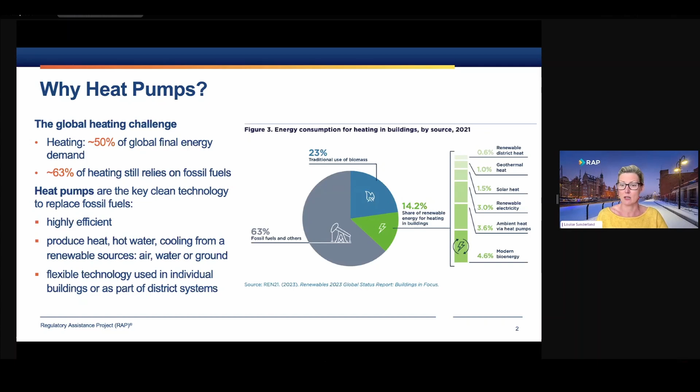They produce heat, hot water and cooling from renewable sources, and they're a really flexible technology. I think we tend to think about heat pump technology in very individual uses, like in a single home, but actually they can be used all the way from providing heat and cooling in an individual apartment, through to providing heat as part of a district heating system, or even for very large installations in industry. It's those credentials that I think have led, I think, all of the global scenarios now to see that heat pumps will be a key part of delivering against 2050 decarbonisation of heating targets.

So just including two examples here, on the left from the IEA, on the right from McKinsey, telling a very similar story. In both graphs, we're looking at the turquoise part. On the left, the IEA is looking at the global heating equipment stock, and you can see by 2030, but very significantly by 2050, the larger part of that stock is made up of heat pumps. McKinsey on the right is looking at sales rather than stock. Similar story though - heat pumps, along with district heating, are making up all of the system sales by 2050.

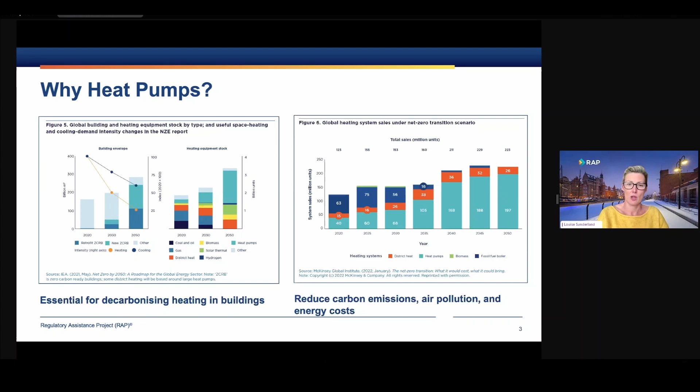And once again, just to dwell on this point about cost effectiveness - largely because of this efficiency that heat pumps produce, they are seen to be the most cost-effective heating solution, if not today, in many places they already are, and certainly in the future. This is one of many analyses from Europe that firmly sees heat pumps - you can see the turquoise bars with the stars above them - as firmly the most cost-effective solutions by 2030 and onwards. I just want to stop and dwell here for a moment, because this technology certainty is huge.

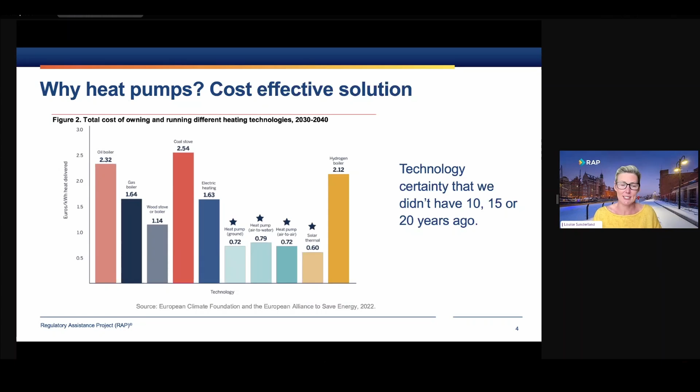When I started my career nearly 20 years ago, working on building sector decarbonisation, we didn't have this certainty. We didn't know what would be the majority solution for decarbonising buildings, and so we couldn't build policies with that much certainty, and we also couldn't build broader building sector decarbonisation goals with that certainty. So this is huge.

So in response, RAP, along with partners including CLASP, GBPN, Agora, and of course with the support of the Crux Alliance, have come together and brought their decades-long global experience with heating technologies from different sectors to build this heat pump policy toolkit. This is a refreshed and expanded toolkit released at the end of last year, and it compiles global best practices on policies and regulations associated with heat pump deployment. I do believe it's the first, and possibly only, of its kind. I'm going to walk you through some elements of that heat pump policy toolkit.

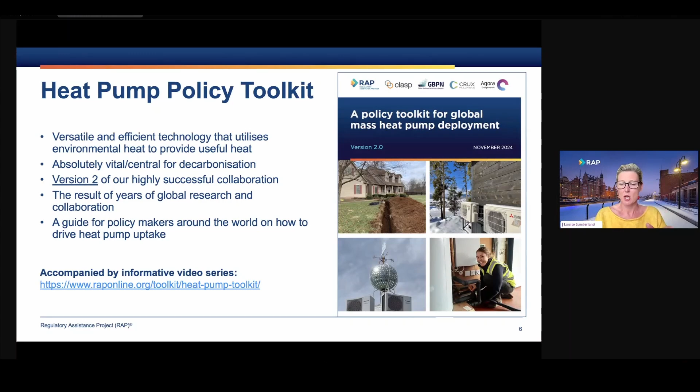But before I do, I want to tell you the story of one heat pump. I do think this story illustrates why we need to look at a policy toolkit, a policy framework, and not just prioritize individual policies, because that would be easier, right? This is the story of my heat pump.

I can introduce you to my heat pump, installed a couple of years ago in the UK. It's important to note the UK is one of the least developed heat pump markets in Europe. Cut to the end of the story: we lived happily ever after. We are very happy with our heat pump. My home is very old, about 150 years old, and we are very happy in it.

I always use the quote from my partner, who was brought up in a very warm country and is very cold-sensitive. He says it feels like summer all year round, which is music to my ears. But what's perhaps more interesting is the process of how we arrived at this destination, and I think it tells us a lot about the need for policy packages.

So first of all, we decided we were going to install a heat pump. I knew, because of the work I do, that my next heating installation would be a heat pump. That's really important to dwell on, because it already put me steps ahead of most other building owners, since I had that knowledge, and it allowed me to go straight to finding an installer.

This was the first challenge I approached, because it turns out in the area of London I live, in southeast London, there aren't many heat pump installers, particularly well-trained ones. So I had to spread the net a little wider and found a heat pump installer in North London. If you've spent any time in London, you'll know it's difficult to even get a taxi to travel from North London to South London.

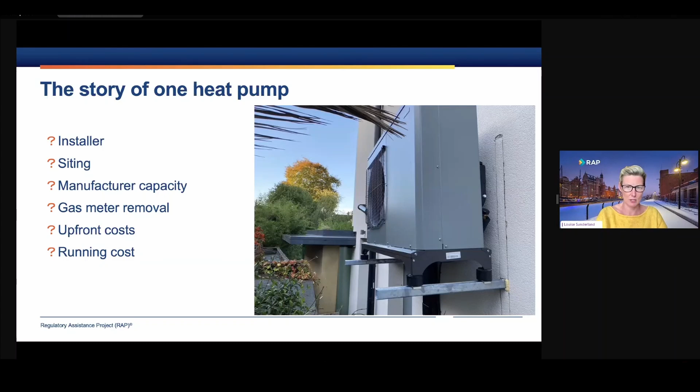The communication elements here are really around public awareness for consumer confidence and trust. When we are making technology changes, this is really, really important, and this is the stuff that I benefited from in my work. But of course, if everyone could know, well, automatically my next heating system will be a heat pump - this is what these tools are there to create.

Importantly as well, I think it is about just-in-time information and just-in-time mechanisms, to make sure that people, as I did, can plan for their installation, not start exploring a new technology like a heat pump when their old system is broken. That's, I think, really, really important.

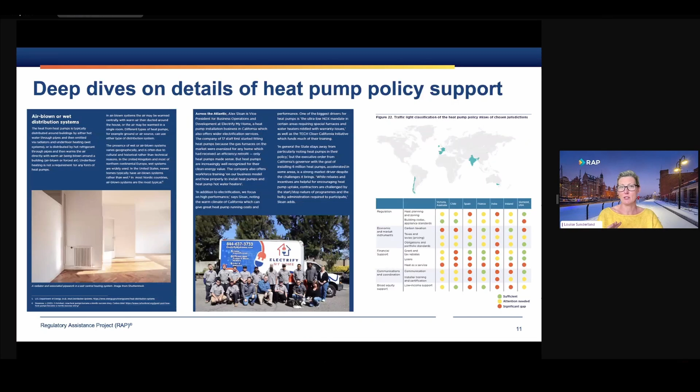So that's the overview of the policy types in the toolkit. We go into quite some depth on successful studies of the different policies and their impacts. I'm not going to go through all these examples, just flagging that they're there. We have deep dives on the policies where they exist, and importantly on which jurisdictions are bringing together lots of the different policy elements in the framework I've described, so we can look to countries that have gone a step ahead or developed their policy frameworks a little earlier.

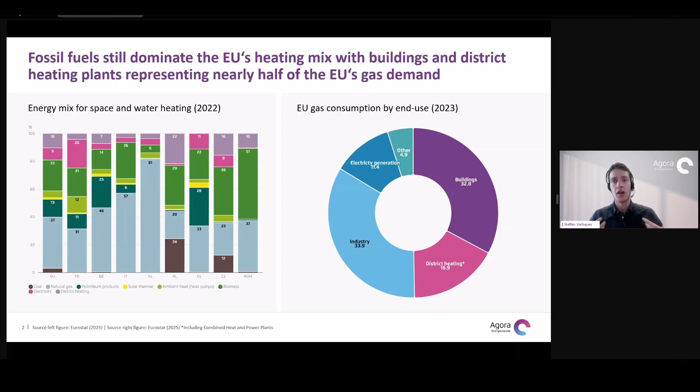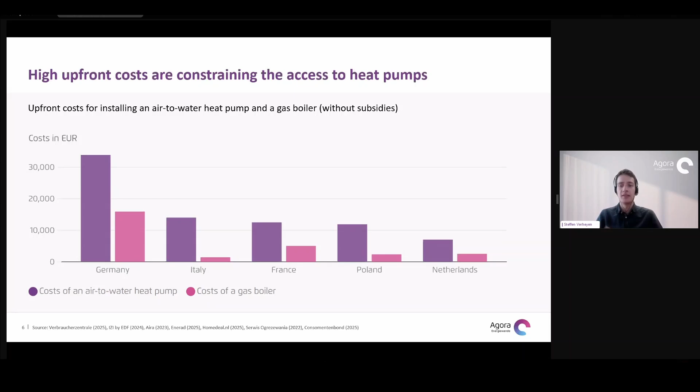This goes hand in hand with another key barrier already mentioned by Louise, which is energy prices. Member states differ quite a lot in terms of the relation between electricity and gas prices. There's a strong difference between, for example, Belgium on one side, where electricity prices are nearly 4 times the level of the gas price, and the Netherlands, where it's only 1.5 times the gas price.

This is, of course, a very influential factor for the affordability, but also the attractiveness of buying a heat pump. In many member states, due to a high electricity-to-gas price ratio, it's currently financially not very attractive to install a heat pump.

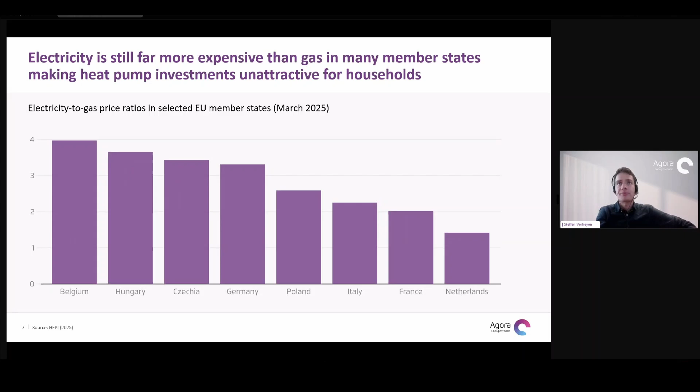A third market barrier relates to the shortage of installers and the availability of heat pump installers. For 6 major European countries, the number of gas boiler installers is way higher than the number of heat pump installers. So for a household trying to replace its heating system, it's sometimes difficult to find a heat pump installer and easier to find a gas boiler installer.

This results in the fact that gas boilers are still a very convenient choice for many households to install, while finding a heat pump installer, especially in some countries, is more difficult and takes more time. So these are the 3 fundamental market barriers.

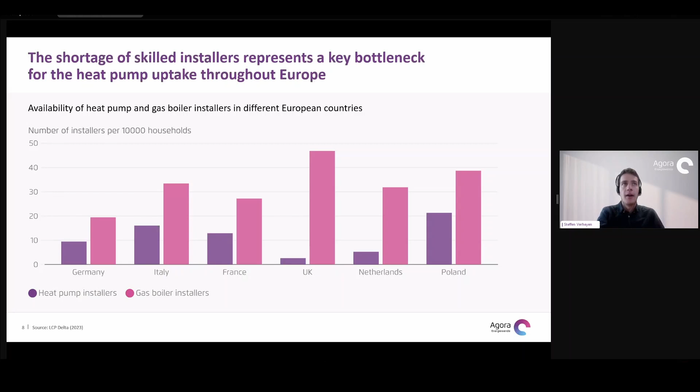As Louise already mentioned, there's a lot that countries have already done to address these barriers, especially the economic ones. In Europe, we can see several policies put in place to reduce upfront costs of heat pumps for households. On the right is an overview of the subsidy levels for installing a heat pump in different member states. We can see that this is quite a relevant reduction of upfront costs.

In all of these 5 member states, for some households, for example in France or Germany, it could be up to nearly 2/3 of the upfront costs financed by the government—a really significant reduction through government support. In some member states, you also have a reduction of VAT for heat pumps, or certain schemes for zero or low interest loans, which help households finance a heat pump investment. So a lot of policies and resources have been mobilized by governments to reduce upfront costs for a heat pump.

There are also increasingly policies for rebalancing energy prices in favor of electricity. The most important one will come into force in 2027: the ETS2, the expansion of the European Emission Trading System to heating fuels. Europe will have a unified carbon price on heating fuels, which will increase fossil fuel prices and therefore make electricity relatively more attractive.

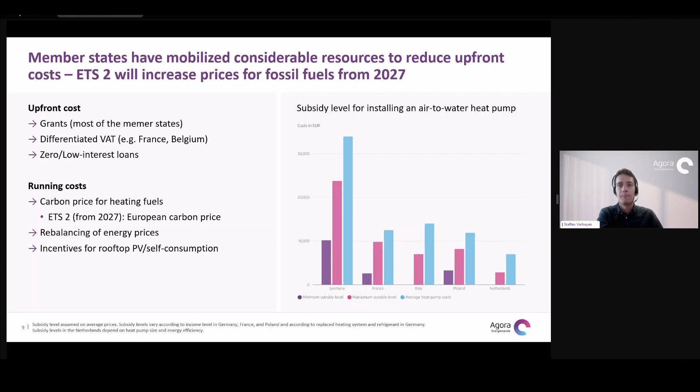On the regulatory side, several policies have been put in place in Europe, both at European and national level, especially regarding new builds, as already mentioned by Louise. Several member states have introduced requirements for new buildings which restrict the installation of fossil fuel boilers. In Europe, we will have zero emission buildings, an obligation in the European Energy Performance of Buildings Directive from 2030, requiring all new buildings not to have fossil fuel boilers. We already see several such requirements in certain member states, such as France or the Netherlands, where gas connections for new buildings are no longer allowed.

We also see several policies regarding energy infrastructure. For example, at the European level, member states are now obliged to create local heating and cooling plans and assess the future of their respective gas grids. There's mandatory municipal heat planning in Germany, and in Denmark it's even planned to entirely phase out the supply of fossil gas to buildings by 2035.

So some policies have been taken here, but, and that's a big but, if we look at existing buildings, at the European level and key member states, not a lot has been introduced regarding the installation of fossil fuel boilers in existing buildings. Here we only have a requirement from the European level to reduce energy consumption by 16% by 2030, but member states are fairly flexible in how they implement this requirement.

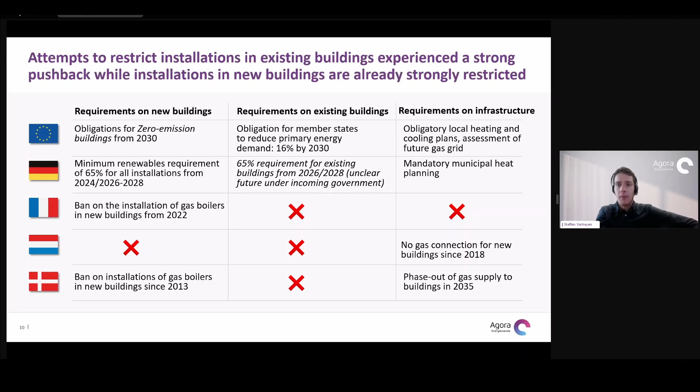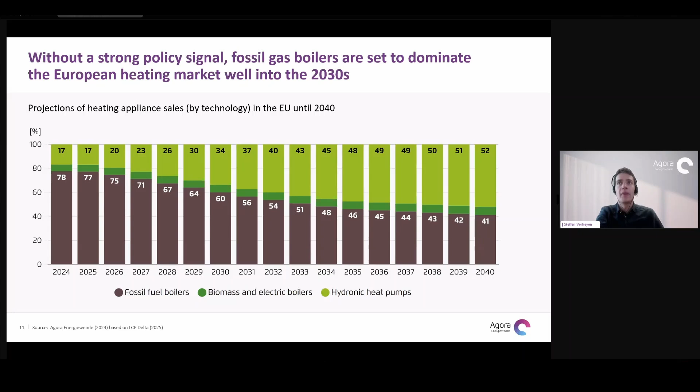If we take a closer look at what would be needed to scale the deployment of heat pumps even further, we can see it's not only one policy, as mentioned by Louise before, but several policies which are needed to make a heat pump attractive.

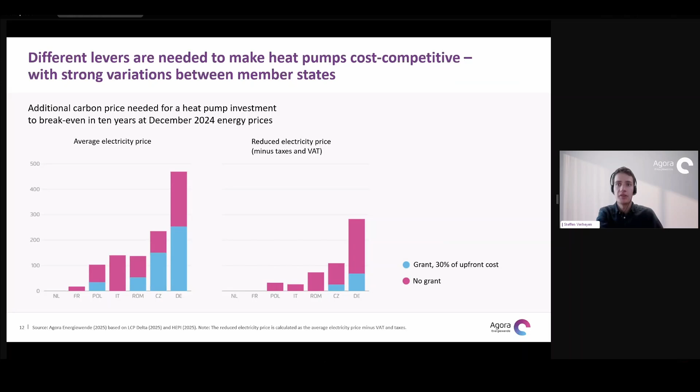This obligation works in a way that manufacturers are required to meet this target every year, and the target increases over time. If manufacturers miss this target, they have to pay a fine, or participate in a credit trading mechanism where they buy a credit from a competitor which has achieved its target. So in the end, it provides manufacturers with an incentive to boost their heat pump sales and make heat pumps more attractive for consumers.

Interestingly, this policy was introduced at the beginning of this month. And what we could already see is that due to this incentive for manufacturers to make heat pumps more attractive for consumers, they, for example, started to offer rebates to achieve their target.

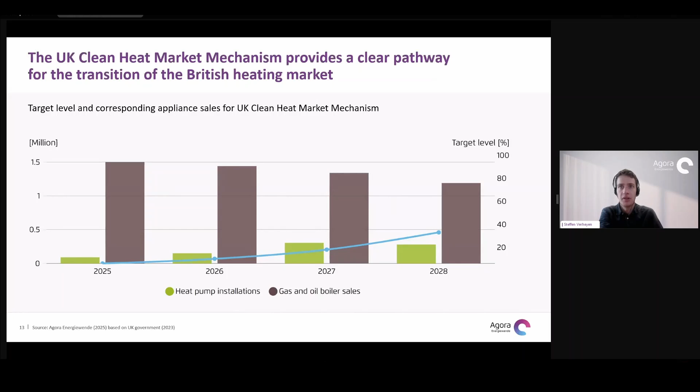And so we thought that this could be an interesting policy as well for the European Union. And we have come up with a proposal of a so-called EU Clean Heat Market Instrument.

I'm going to spare you the details, but basically it would be a similar policy instrument at the European level, where manufacturers would need to first report their sales. Then they would be benchmarked based on their sales performance, and in the end they would also have a type of charge or fine, which would incentivize them financially to sell more heat pumps and make them more attractive. That's a very important distinction from traditional policy instruments such as grants, where the incentive is directly given to the consumer.

But under this policy, it would be an incentive to market actors. So market actors would be motivated to reduce prices for heat pumps and make heat pumps more accessible, for example through a streamlined installation process.

Regarding the three most important points of this instrument: first, as already mentioned, the instrument would activate market actors to make clean heating more accessible, both through decreasing prices and providing more technical support.

We also see this policy potentially signaling governments' dedication to clean heating goals. And we see this policy increasing the effectiveness of carbon pricing, because this instrument would provide an economic incentive not only on the heating fuels, such as the carbon price, but also on the heating appliance itself—another economic incentive for consumers to switch to clean heating.